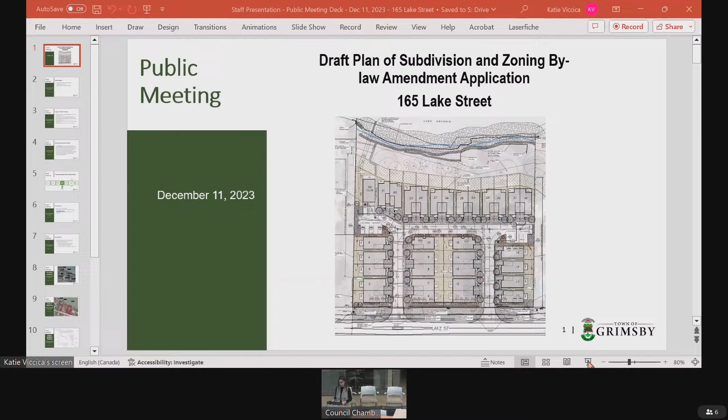Good evening, everyone. My name is Kayla Horton, and I am a planner with the town. I want to thank you all for taking the time out of your schedules to join us for this public meeting. The project to be discussed this evening is the proposed zoning bylaw amendment and draft plan of subdivision applications for the properties at 165 Lake Street.

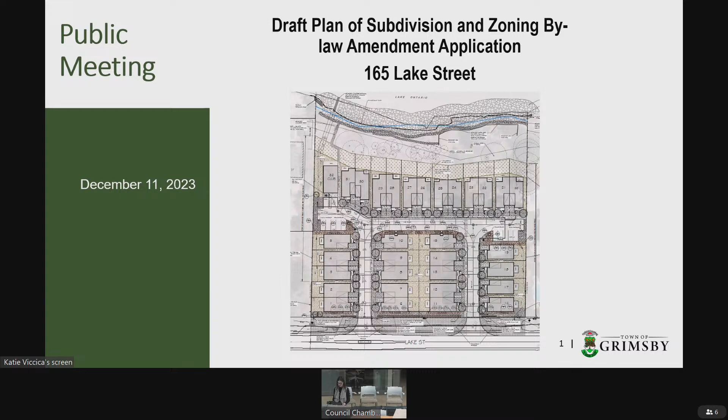Next slide, please. To begin this public meeting, I will be going through a short presentation, providing you all with some insight into the planning process of this application and briefly introduce what is proposed for the site. Next slide, please. Just to go over the purpose of the meeting tonight, we would like to provide you all with an overview of the planning process for these types of applications.

This includes the process from start to finish and where exactly the town is in this process. An overview of the policy and regulatory framework will also be provided, including the relevant official plan policies and zoning provisions in place. Agency feedback that has been provided will be touched upon. Mr. Ferrari will provide additional details about the proposal, and finally, we are here to answer any questions you may have and gather feedback, which will be taken into consideration to identify any potential revisions that may be needed.

So why can plans or bylaws change? Under the Planning Act, authority is provided to submit applications for development plans that may not meet the current official plan or zoning bylaw. The town's role is to process these applications. These applications are only able to amend the official plan or zoning bylaw if it is determined that the proposed changes comply with the overall intent of the official plan, and the result is a development that is compatible with the surrounding area.

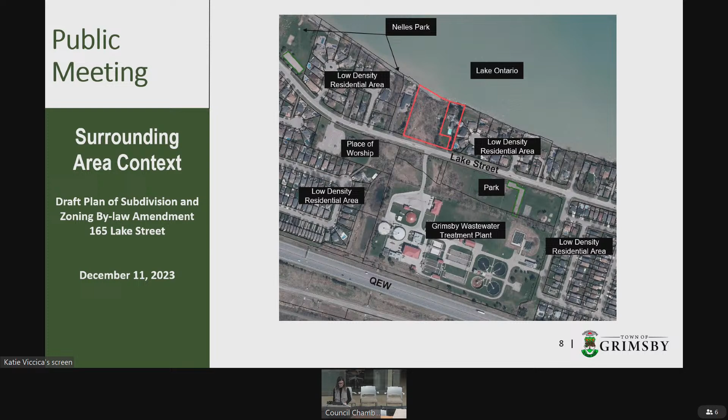The subject lands are a rectangular-shaped parcel located on the north side of Lake Street along the shore of Lake Ontario, comprised of the lands municipally known as 165 Lake Street and the adjacent vacant parcel to the west. The subject lands are comprised of two separate lands as shown on the screen. The site is currently occupied by a single detached dwelling with associated accessory structures, an in-ground swimming pool, and multiple existing trees. West of the subject property along the shoreline of Lake Ontario is public access to the waterfront as shown on the slide.

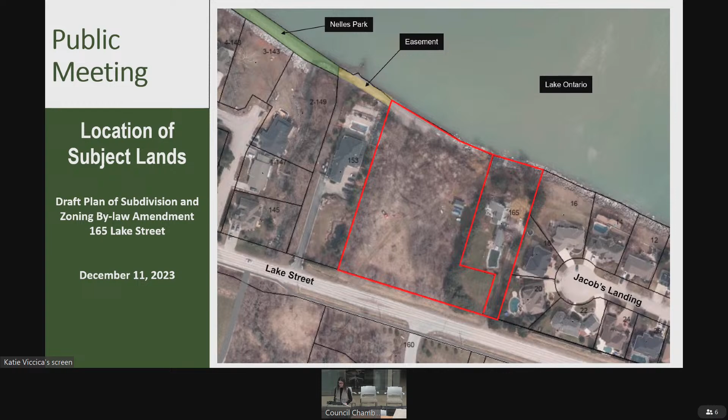Moving on to the proposal, this slide shows the preliminary draft plan of subdivision. The applicant is proposing a zoning bylaw amendment and a one-block draft plan of subdivision to facilitate the proposed development, which I will show on the next slide.

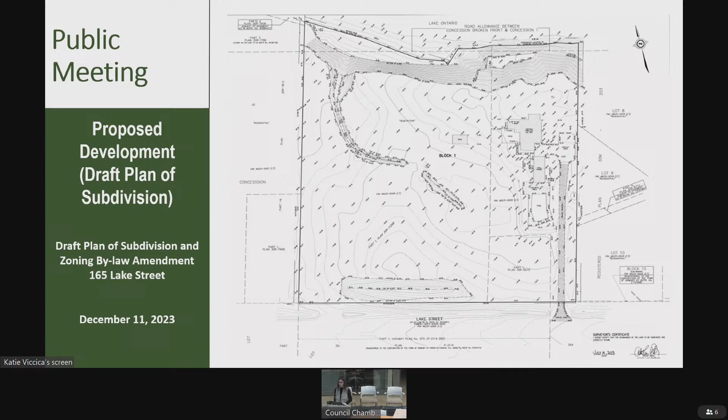The proposed development is to create 31 new residential dwellings, which include 24 semi-detached dwellings and 7 single-detached dwellings. The proposed zoning would be amended from the residential detached 2, RD 2.35, and neighborhood development ND to multiple residential, otherwise known as RM1 zone.

A future condominium application will be related to these applications in which a common element condominium road would loop through the site. The applicant's presentation will provide more detail on the proposed development concept.

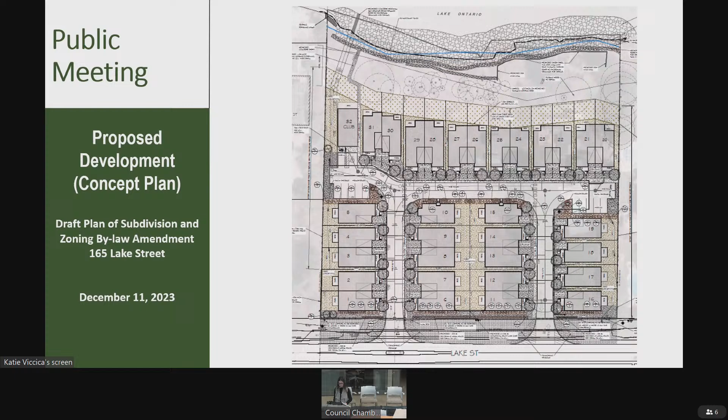The policies for the low-density residential area designation is located in section 3.42 of the official plan. This designation permits a mixture of residential uses, including single detached and semi-detached dwellings. It is considered a stable residential neighborhood, but does allow for limited development, evolution, and rejuvenation.

The policies for the environmental conservation area designation is located within section 3.12 of the official plan. Lands designated as environmental conservation area form part of the natural heritage system and represent significant natural features and core natural areas within the town, including key natural heritage features and key hydrologic features within the Greenbelt Plan. Development and site alteration must demonstrate through an environmental impact study, otherwise known as an EIS, that over the long term, there will be no significant negative impact on natural features or ecological functions on adjacent lands.

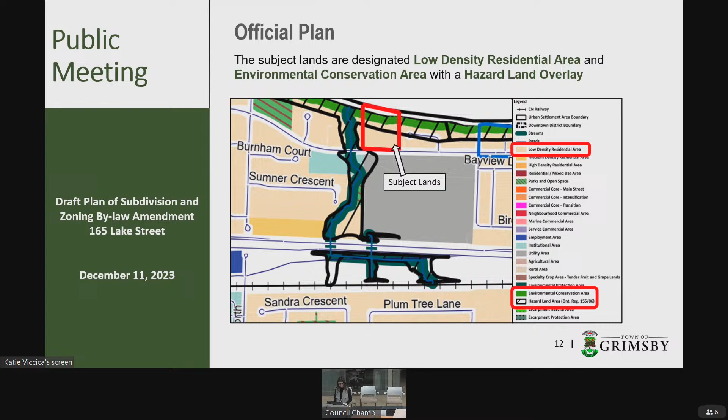The policies for the hazard land overlay are found in section 3.2 of the official plan. The hazard land overlay represents areas that have inherent physical hazards, such as flood susceptibility, steep slopes, erosion susceptibility, or other physical conditions which is severe enough to cause property damage and/or potential loss of life if the lands were to be developed with habitable buildings or structures. As such, flood and erosion-prone lands along the shore of Lake Ontario is included in this overlay.

As stated earlier, the subject lands are currently zoned neighborhood development ND and residential detached 2 RD2.35 with a hazard land overlay zone HA. The hazard land overlay zone is shown in light gray in the image on the screen. The neighborhood development zone permits existing uses and existing zone regulations. The residential detached 2 RD2 zone permits a range of residential uses with a 35% lot coverage. The hazard overlay zone restricts development, and the provisions of the overlay zone supersede the provisions of the underlying zone. Permitted uses, among others, include flood and erosion protection work, parks, and conservation use.

The application for a zoning bylaw amendment proposes to change the zoning to multiple residential 1, RM1, with site-specific modifications in place to facilitate the development of 31 new residential units. Proposed modified performance standards include additional permitted uses for single detached dwellings and an accessory amenity building, maximum building height, minimum lot area, minimum lot frontage, maximum lot coverage, minimum front yard, minimum exterior yard, and minimum rear yard. Please note that the application for a zoning bylaw amendment does not remove the hazard land overlay zone.

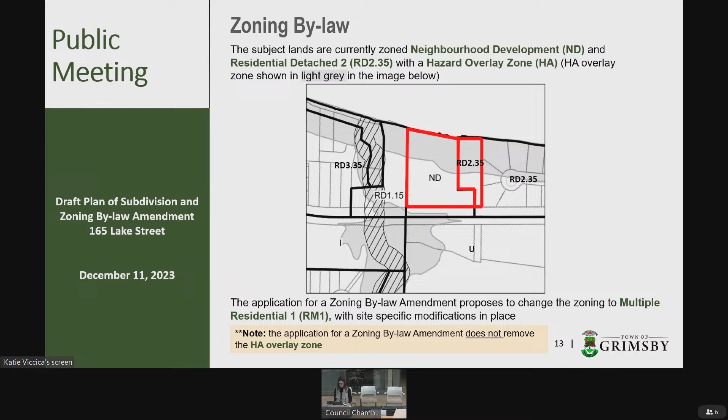The applications were circulated to external agencies and internal departments for review and comment. A full comments matrix of all agency comments is provided in Appendix F of Staff Report PA 2341. Comments include conditions of draft plan approval of subdivision, technical comments related to grading, servicing, drainage, and other impacts were also provided to the applicant, among others.

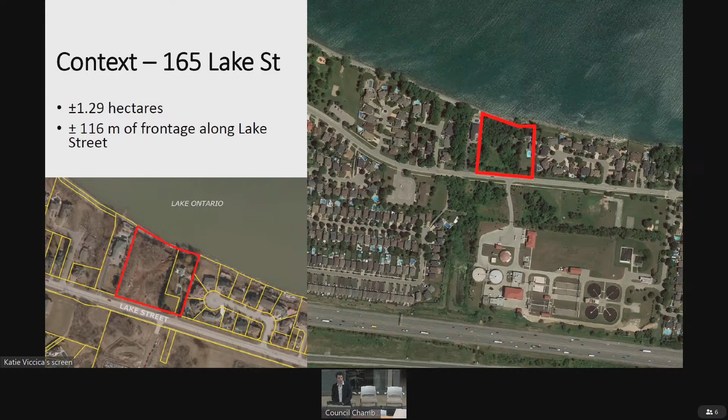I'll go over a little more detail about what exactly we're proposing here. Kayla provided a good overview of the site. I think everyone knows where we are, 165 Lake Street. It's actually technically 2 parcels of land. It abuts Lake Ontario currently, and is primarily surrounded by low-density residential uses. If you go to the next slide.

I want to spend a little more time on exactly what's proposed. We're proposing a draft plan of subdivision with 1 block. The reason why it's 1 block is because this block will be further subdivided at a future time to delineate individual elements of the future condominium. So I'll go through that in a second, but I just want everyone to understand this is 2 applications, not just 1. It's a subdivision, technically, and a zoning bylaw amendment. So we can go to the next slide.

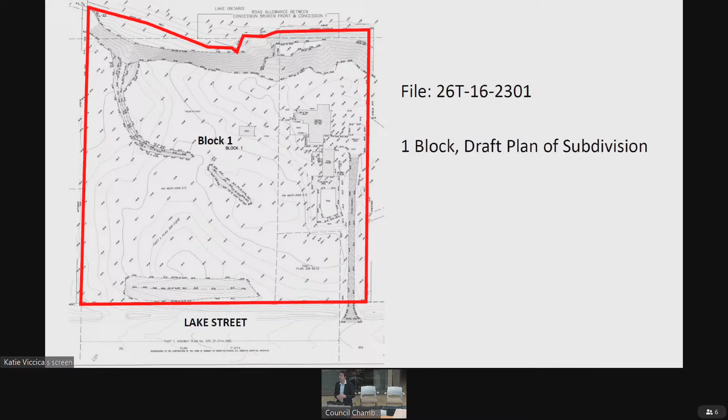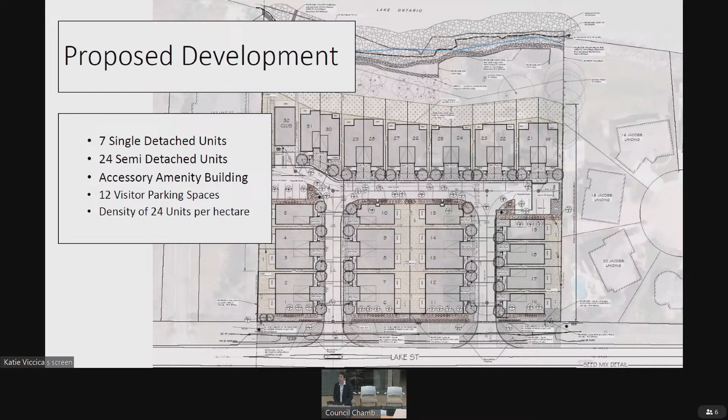I have a better view of our site plan, but I just want to give everyone a high-level overview of what we're proposing. The idea is that what will be subdivided are each of the individual lots of the future units here. There will be a common element proposed, which will comprise of that private road, with 2 entrances onto Lake Street. In the top left corner, I have a better picture in the next slide. There's going to be an amenity clubhouse. Yeah, and the next slide shows that as well.

So what's being proposed here are not townhomes. What is being proposed are single detached dwellings and semi-detached dwellings on these lots. The amenity clubhouse is on the top left corner there, delineated by number 32. What's going to be there is a fitness area and a rec room area, which is the exclusive amenity intended for the residents there.

I also want to point out on this site plan, at the top is Lake Ontario. That blue line approximately represents where the shore is today. So what I just want to impress upon everyone is the setback between that blue line and the back of the dwellings proposed on this site. There will also be shoring protection works, which I'll get into in a second.

Primarily, these dwellings are going to be 2 stories. There will be an amenity deck on most of them, and we have a slide later on to show you where these amenity spaces are going to go, because one of the things that's important to us is mitigating any overlook conditions. I'll show you that slide in just a moment. Next slide, please.

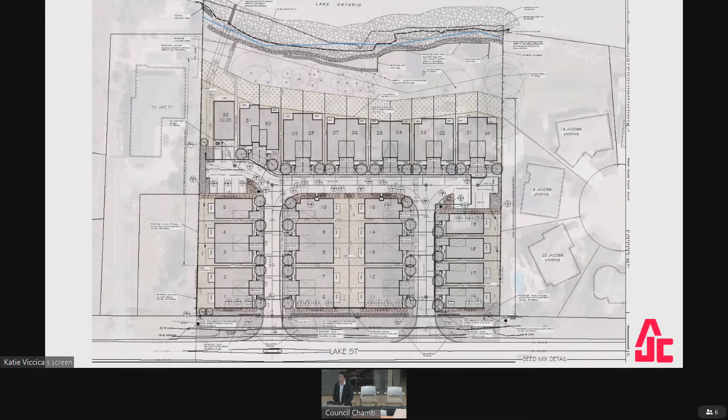Just high level, I think it's important to highlight the process we've been through so far. As Kayla noted before, this application originally came into the town of Grimsby back in 2023. Since that time, staff gave us a whole list of studies to prepare. I won't go through them exhaustively, but I have the list here. They included things like an environmental study, an odor study, a shoreline protection plan, a tree protection plan, a site plan, renderings, things of that nature.

Engineering plans, grading, servicing — those questions might come up today. So all these plans have been submitted to staff as of November of this year, and they have been reviewed. But I also want to impress upon those here in the committee today that Sam and Stephanie have tried their best to reach out to neighbors, especially the immediate neighbors to the east and west of the property, to let everyone know that this development is coming through.

And I know this is probably the first time everyone's seeing a lot of details, which I'll provide later on in the presentation, but it's something that I wanted to impress upon Sam and Stephanie at the beginning: get out, talk to the neighbors, show you what we're doing. Certainly we're open to keeping a dialogue with the neighbors because my understanding is it's been open so far and we want to continue that.

So discussions with neighbors happened June, July of this year. We made a submission in September. We did do a site visit with NPCA staff, who are the local conservation authority, with local staff as well. Park staff were there. So we've done a whole review of the subject site. We visited it, staff visited it. We know what the on-site conditions are. And then we just received staff comments a couple of weeks ago. So the goal of this meeting is to go through those staff comments from a technical perspective and receive any feedback from you folks here today. And we're going to incorporate all those comments, look at them, and provide feedback to staff after this meeting. So I just want to provide a quick overview.

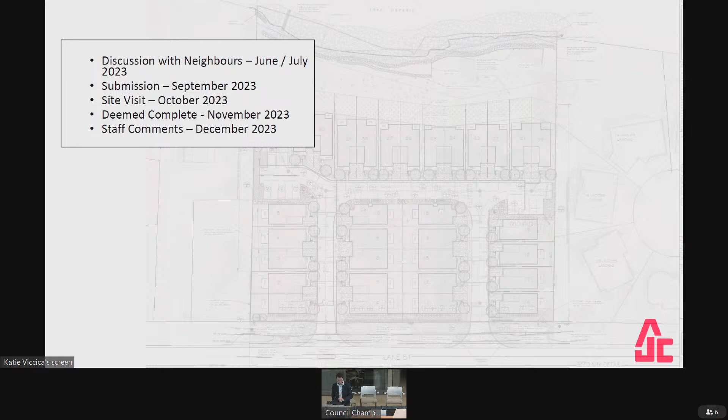So now, rather than getting into too much detail, this is the preliminary shoring wall design. As you can see, it stretches across the site and will join up with an existing shoring wall on the east and west. So the west side has been shored and the east side has been shored. The whole purpose and intent of the shoring wall is to establish a stable top of slope from the lake. And outside of this whole development, regardless of the 31 units, this work needs to be done, okay? To shore up the wall and to provide a solid setback for the dwellings you see facing the lake. So this is a preliminary shoring design.

What will happen at this point, and Milo may be able to speak to this a little bit later on, our shoring consultant - this is a preliminary design. Detailed design is going to take place through the draft plan of subdivision process and included as a condition of that draft plan. So preliminary design shown here. There's still a lot of work to be done on the shoring design. And certainly we'll look forward to working through that with staff.

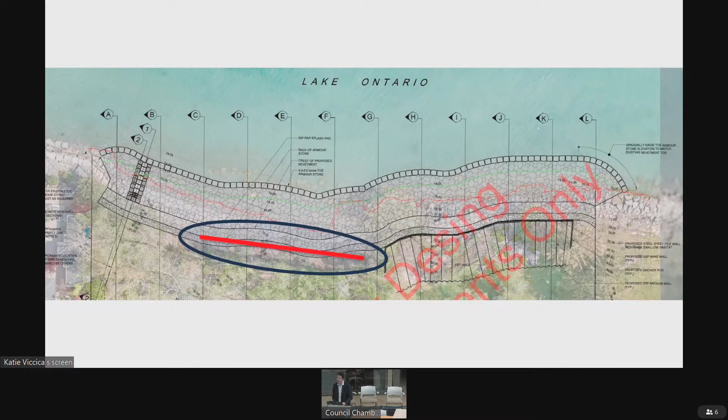One thing I want to point out here, everyone sees a red line and a blue circle surrounding it. What this line represents is an existing habitat for an endangered species. They're a form of nesting birds that like to burrow holes in the side of the hill. So the current condition today, and I have a picture of this on the next slide, is it drops off as a cliff. You can sort of see this here. This is from our site visit. So these birds nest in the side of the cliff here.

They burrow holes, so because these are species at risk, we do have to be mindful of them. So what our plan is, we're going to recreate their habitat, shown on the next slide. So as part of that shoring wall works - and this is just an example, this is actually a stock image I just pulled up from the internet - these birds, we're going to put these hollow areas for these birds to nest in. And basically what that's going to result in is no construction can take place during breeding bird season, right? So construction can only take place between October and March of any given year. And that's how we're mitigating for that.

There is a process that goes along with this with the Ministry of Environment, so it's even above the city and the municipality's purview. But it's something we're working with the ministry on. We're going to submit what's called an overall benefit permit to them to show them how we're mitigating for this habitat. And so that's going to be another feature of the shore wall and something that we're mindful of and considerate of and want to make sure we do right. So I just wanted to note that as well.

So the shore wall is a complicated thing. There's a lot of engineering that goes into it, but also we have to deal with species at risk that are on site as well. So that's a little bit about the shore wall. Next slide.

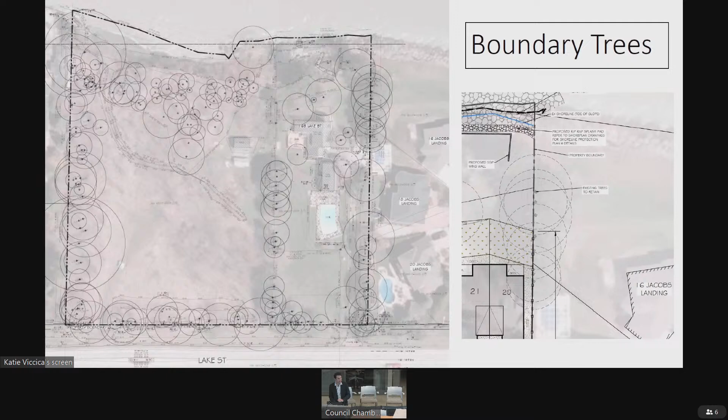The goal is to maintain them whenever possible. There are techniques like air spading we can use to help keep the trees alive. If this application is approved, we'd submit a detailed tree protection plan showing how the trees would be retained. Sam and Stephanie have already spoken with the neighbors about compensation if there's injury or damage—whether new trees would be planted or monies owed. That would be between my client and the neighbor owning the property. I mention this because it's an important issue we've tried to get ahead of, and we'll continue speaking with our neighbors about the boundary trees.

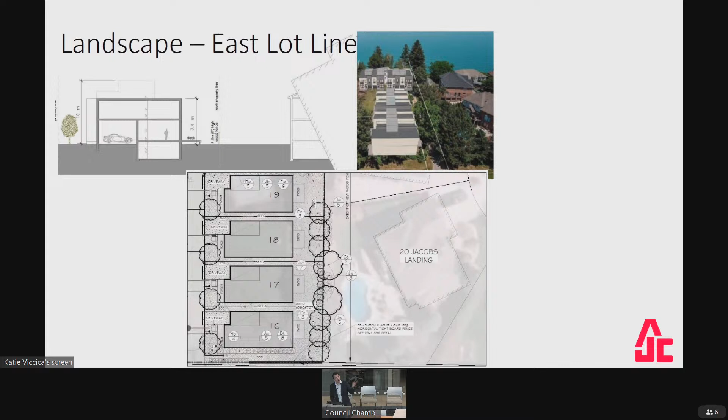I'll go to the next slide, which has better pictures of the sections. I touched on this top floor amenity—we've taken care to mitigate overlook on people's privacy areas. It's a bit tough to see here, but if I could point everyone to the 4 single detached dwellings, generally on the bottom right corner of the picture.

There are amenity spaces on the top floor. They face out into the development, not into neighboring properties. So for those 4 dwellings, no one will be able to access the roof and look into your backyard—they'll be looking out towards the development. The same rule generally applies on the other side.

The section at the top right corner shows the built form. I have renderings in a second, but these are 2-story dwellings with a vestibule to access the rooftop amenity, pushed into the middle of the building so it's as far from the edge as possible—again trying to mitigate overlook concerns. Next slide, please.

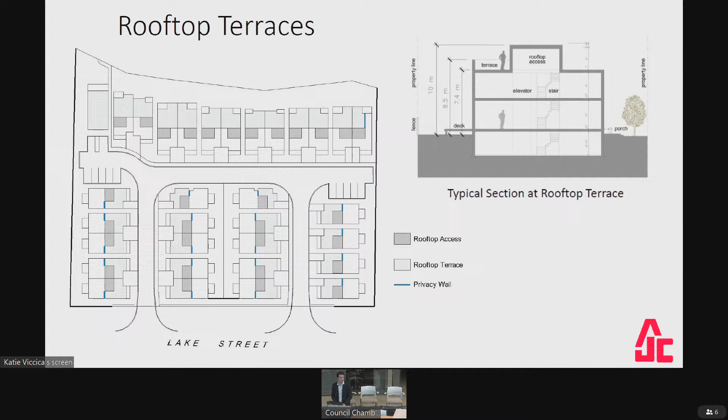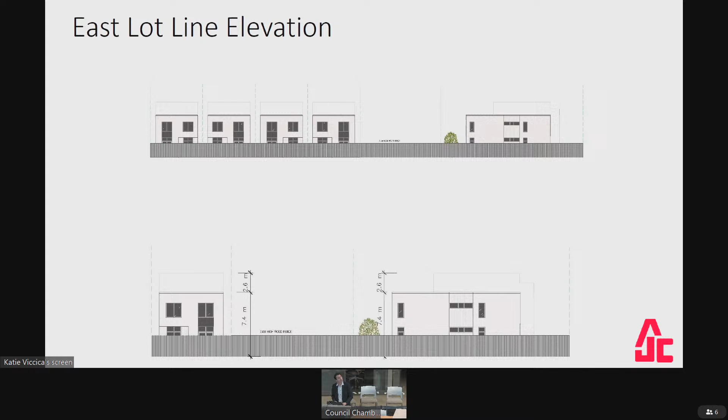So with the next slide here, there are some appendices we can go to. They're just supplemental information, not necessarily part of my presentation, but if we need to refer to them, we certainly can. At this point, I'm happy to stop, open to any feedback folks want to provide, and answer any questions. If we can't answer them today, we'll go back to our consultant team and answer them as soon as possible. So that concludes my presentation, I'm happy to answer any questions.

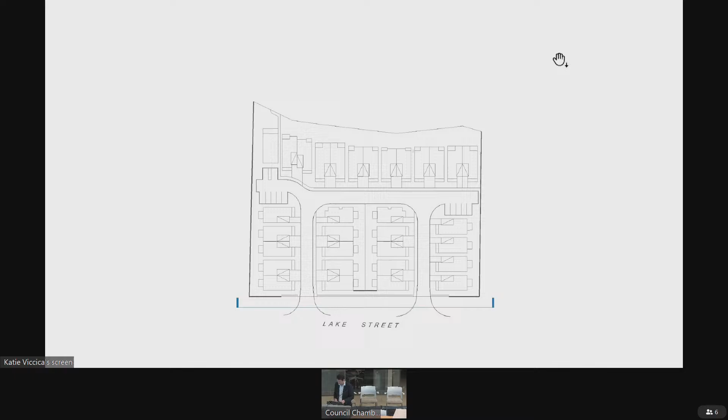Thank you for your presentation, Ryan. Now we will open up to members of the public. First up, we have Richard and Linda Dunda.

Just a couple of questions. Yeah, you go up to the podium. One was the exterior—yeah, you need to go up to the podium.

Hi, we just had a couple of questions about the exterior—stucco, brick, whatever—because there were no renderings online. And the second one is, if I read correctly, it's 3 meters, or 1 meter, 0.9 meter between dwellings. Does that include the semi-detached as well as the detached? And then I also didn't notice any extra visitor parking, unless I missed it.

That's it, thanks Richard. Up next, we have Dennis and Debbie White.

Hi, we live on Jacobs Landing. We'd like to know when the neighbor consulting was done, because we were not asked about this.

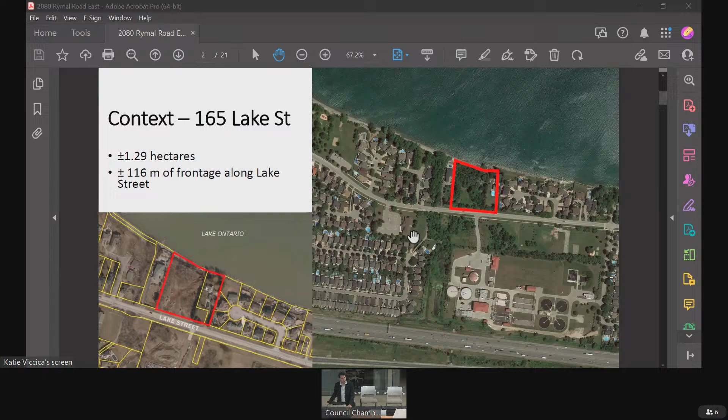It's all right. Yeah, if you can just pull up the site plan when you get a chance. And if possible, zoom in to the right side where it says 18 Jacobs Landing, best you can.

I'll go through the questions one by one and do my best to answer them. I think one of the gentlemen mentioned a 0.9 meter setback. I believe this refers to the closest point of the curb to the property line. In our bylaw, we recognize the location of the driveway adjacent to the property line, but there's a pinch point at 0.9.

The reason for that is to provide car turning movement coming in and out of the visitor spaces and the driveway there. If that doesn't answer your question, I'm happy to stay and discuss it further.

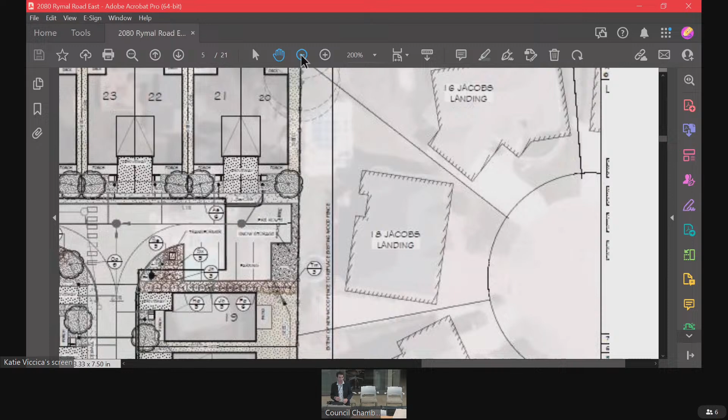Regarding visitor parking, there's two banks, and I'll wrap these together. There was some discussion about the clubhouse and how it interacts with visitor parking. The clubhouse is an exclusive use amenity for residents of this development. The intent is there may be a fitness room, and a room that owners within the condominium can use for gatherings, barbecues, things like that. It's not intended to be a public clubhouse that anyone can go to. It's strictly an amenity for the residents there.

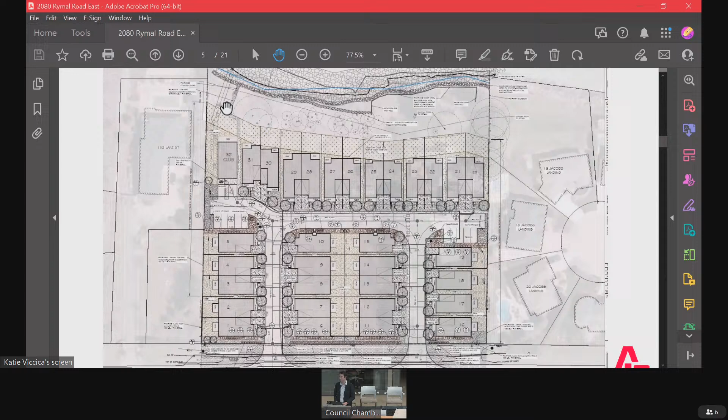There will be some visitor parking, but there's cars on the driveway and there's also visitor parking as well. Staff didn't ask us for a parking study when we submitted, and we felt the number of visitor parking spaces is appropriate for how many units we have. So I hope I answered that question.

There's some question about materials, and I think Craig is here. I don't know if he wants to just mouth me what we're looking at with materials. I think we want to avoid EIFS - that's what we want to avoid, right Craig? Materials are stucco, stone casing, and concrete and metal siding with wood.

There was someone online that mentioned consulting. Just to be very specific, we consulted the immediate neighbors to the east and west. The gentleman online didn't tell me where he lived, so I assume he wasn't one of the 3 houses on the east side or the neighbor on the west side. So that answers the question about neighbor consulting.

There was a question about energy efficiency, which is a great question. We're getting that question time and time again. It's something we're going to take back and look into now that you've mentioned it. At this stage, the zoning stage, we don't typically go in and fully design the buildings, as that happens at building permit stage. But now that it's been mentioned again and again, we can certainly look at that through site plan and make it a priority.

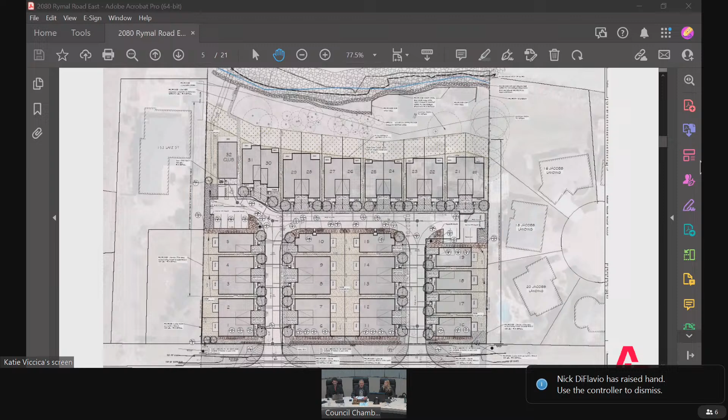All right, thank you, Ryan. Any further questions from the public? Walter? All right, okay, go ahead.

Just to answer, through the chair, Councillor DiFlavio's question regarding waterfront access—the town has requested a public access easement to the northwest corner of the site, and we'll be requesting cash in lieu for the remaining amount. Details of the layout of that easement and the routing will be dealt with at a future site plan stage. Thank you. Great, thank you, Kayla.

All right, seeing no further questions, thank you everyone for participating in the public meeting. The consultants and staff will take back your feedback, and please contact staff at planning@grimsby.ca if you have any additional comments or questions about the proposal after this evening. The public meeting is now closed. Thank you.

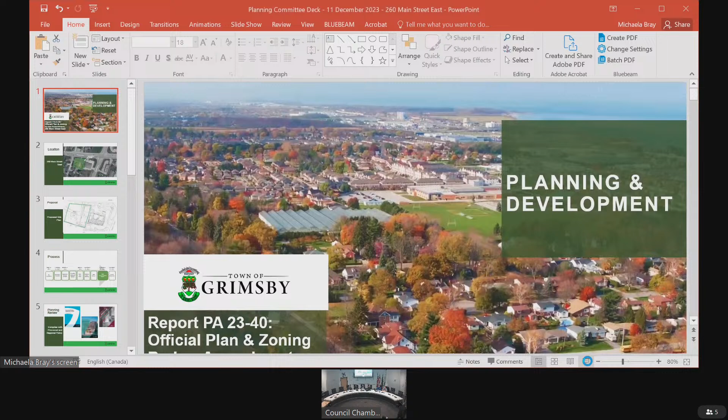Good evening, everyone, Mayor Jordan, councilors, members of Planning Committee. My name's Michaela Bray, planner with the town of Grimsby, and I'm here to present report PA 23-40. This is the recommendation report for 260 Main Street East for their application for an official plan amendment and a zoning bylaw amendment on the site.

The location of the site, the subject lands of these applications, is 260 Main Street East, right at the intersection with Park Road South. This slide shows both the site that is the subject of these applications, as well as the adjacent site directly to the east, 264 Main Street East, which these applications kind of facilitate development that's actually going to be happening on the site next door. But I'll get a bit into that further.

I just want to note that last month, I believe it was November 21st, a consent application went to the Committee of Adjustment, and that was to sever the easternmost part of land on the subject lands. The intent of that is to merge that severed land with the adjacent lands at 264 Main Street East to increase the available parking there. This increase in parking on the adjacent lands is mostly going to be on that severed parcel that will be merged with it. So all the development is kind of happening right in that center part between the dwelling on the subject lands and the existing commercial building on the adjacent lands to the east.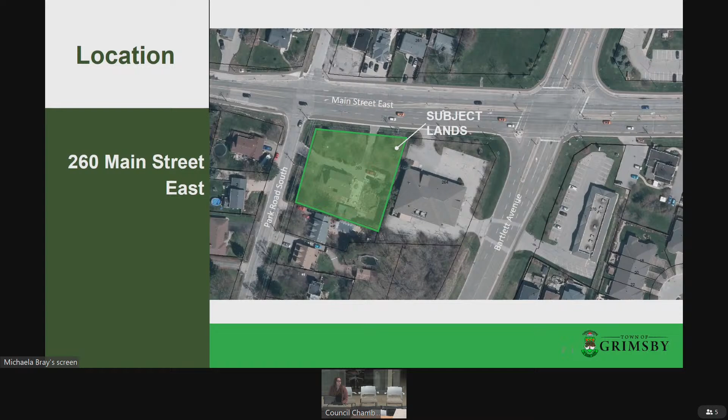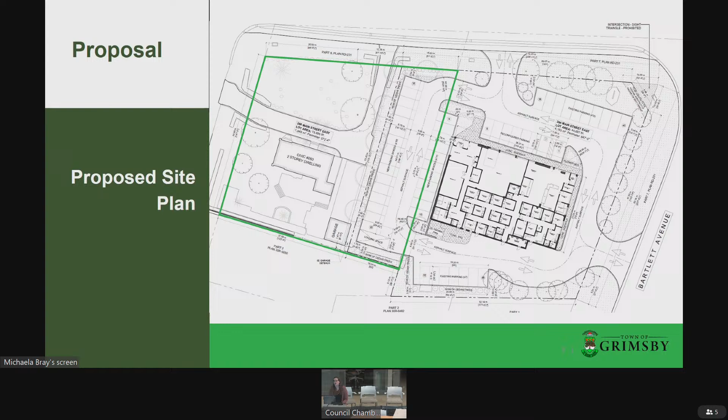For the proposal, as I mentioned, the applications are for the lands at 260 Main Street East, and it's an OPA and ZBA. I'll get into details on that. The zoning bylaw amendment really applies to the full extent of the subject lands at 260. The official plan amendment and zoning only apply to that part which was severed by the Committee of Adjustment last month, pending being merged onto the adjacent lands. But I have slides with more detail on that coming up.

I'm just going to go over some of the process for this application, relating to the official plan amendment and zoning bylaw amendment only. As some of you are aware, there have been other applications on these lands and the adjacent lands, such as the consent I was mentioning, and a previous minor variance from about two years ago. That variance was just to allow some reduced parking with the condition that part of that commercial building on the adjacent lands wasn't being used.

For the OPA and ZBA, the initial pre-consultation was in May of last year. We received the application submission in February of this year, got all the materials, and deemed it complete by the end of March. Since then, we've been doing review both from the town and external agencies. We did the public open house back in April, and the public meeting in September. We've been doing analysis ever since, and we've gotten to the point in the application that we're comfortable giving a staff recommendation to the planning committee right now. Depending on the committee's decision today, the recommendation will go to council on December 18th to be ratified.

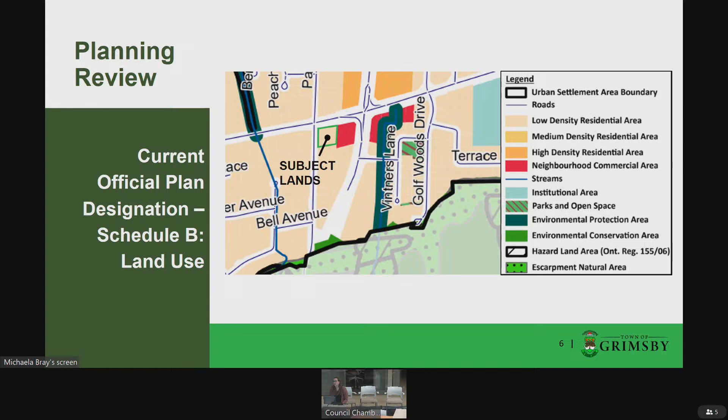The proposed official plan amendment applies to Area A, which would be redesignating from low-density residential to the neighborhood commercial area designation. That designation would match what is on the adjacent lands at 264 Main Street East, so that sliver rectangle of land that's going to be merged would all end up being neighborhood commercial.

Area B is going to maintain its low-density residential area designation. It's also going to maintain the heritage dwelling and its residential use on it, so there's no change to that area for the official plan amendment.

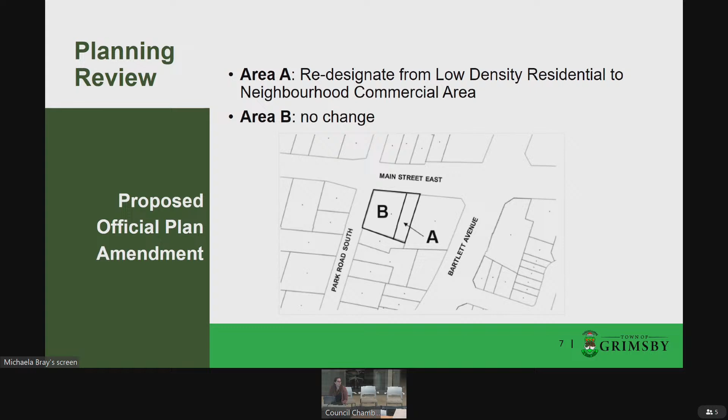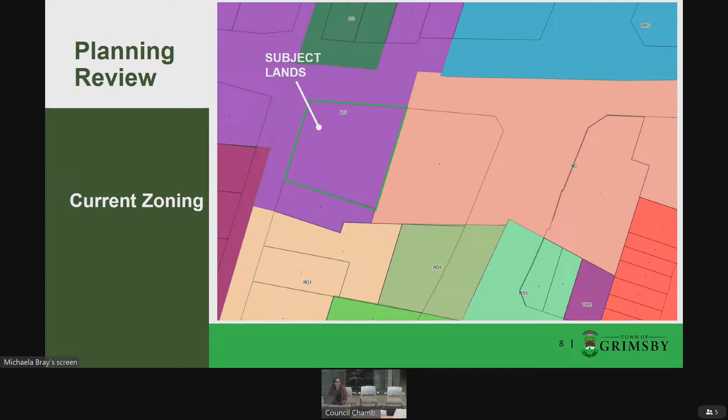Going over the zoning, the current zoning for the subject lands is a Main Street zone with no site specifics. The zoning amendment does apply to the entire site, so both parts A and B.

Part A, the land that's going to be merged with the adjacent lands, is currently that Main Street zone, and it's going to be rezoned to neighborhood commercial, matching the adjacent lands at 264, except this small strip area A is going to have its own site-specific zoning, related to a reduced landscaping strip, a reduced parking lot setback, and a reduced parking space setback from the road.

Area B is being rezoned from a Main Street zone with no site specifics to a Main Street zone with site specifics, so we're really just adding a couple site specifics to legalize some of the existing conditions. When part A is merged with the adjacent lands, it's going to reduce that interior side yard setback, just to legalize a reduced setback from the existing accessory building, which is a garage, to what would be their side or rear lot line.

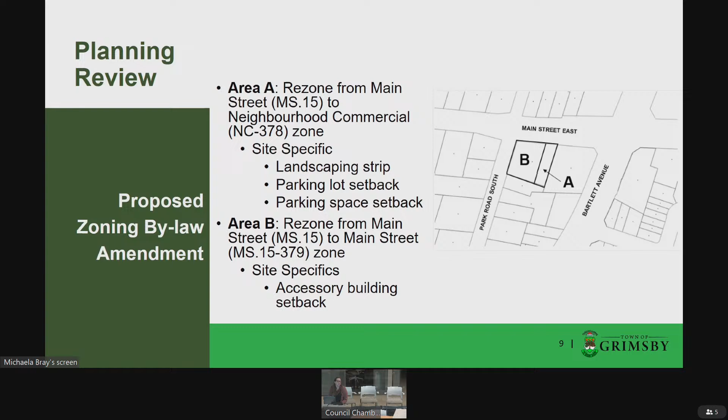Now I'll get into the planning review. As I mentioned, the subject lands are currently designated low-density residential area, and the intent of that is to protect and enhance the existing character while also permitting new development that is compatible with what's existing. A majority of the subject lands, Part B, is going to maintain this low-density residential intent. The entirety of the frontage on Park Road South is going to keep this low-density residential area designation, and a majority of the land facing Main Street East is also going to be keeping this low-density residential designation as well.

As I mentioned, Part A is going to be neighborhood commercial, and the intent of that is to meet daily and weekly shopping needs of the surrounding residents. I also wanted to touch on municipal principle number 10 in the official plan, which promotes using existing infrastructure and not sprawling.

Site layout and design compatibility: there's not a lot of changes to this one. All the buildings that exist on the subject lands as well as the adjacent lands are going to remain as is. The heritage building will be maintained and used continued for residential use, as well as their accessory building. The existing commercial building is going to continue to be used, and that won't be changing.

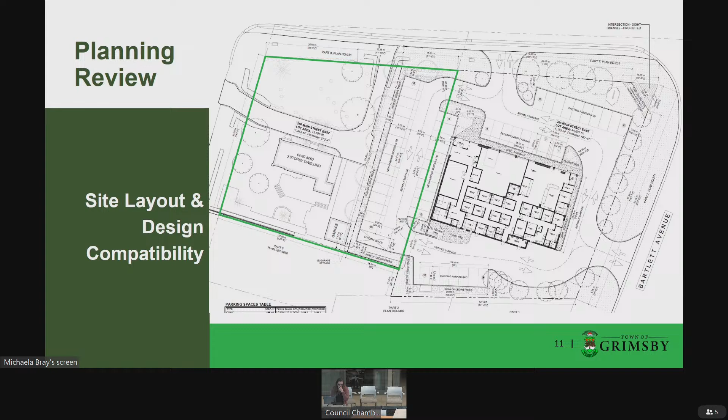I also wanted to note that this commercial building on the adjacent lands is highly visible from Main Street East. By expanding that parking lot and allowing for more uses to go in, since they'll have sufficient parking, it just affords additional businesses and commercial uses the ability to take advantage of this highly visible site on a fairly busy thoroughfare in the east end of town.

So I'm going to go over the parking. That really is the main part of this application.

Starting with the subject lands, that residential dwelling, they're going to be keeping that minimum 2 parking spaces. That's required by Section 5 of the zoning bylaw. They likely have multiple times over that, but that's going to be maintained.

And then on the adjacent lands, they currently have 29 parking spaces, and they've been able to prove that there can be around 47 parking spaces in result.

And where that comes from is that the medical clinic portion of the building is proposed to be about 500 square meters, and using the parking rate of 1 space for 15 square meters, that requires 33 parking spaces for that use. And then the remaining 342 square meters of the building that's not being used for the most part right now, that's kind of necessitating this application.

For a general commercial use, it would be 1 parking space for every 30 square meters, and that therefore requires an additional 12 spaces. So if we were going to base the parking off of medical clinic use and general commercial use, the total number needed would be 45. They have shown that they can go over that by a few spaces.

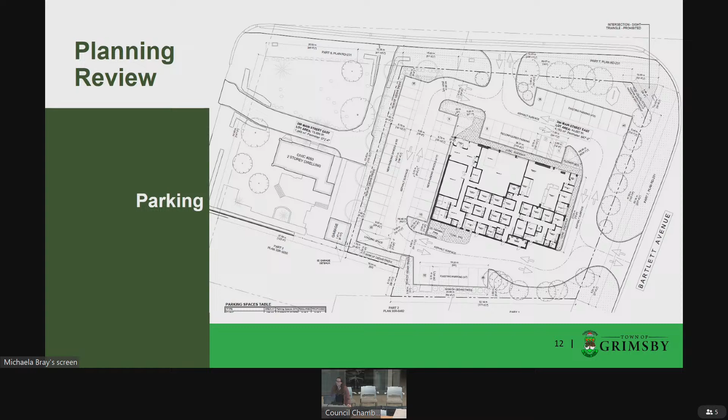So this site, the adjacent site, 264, is subject to site plan approval through bylaw 2251, and that'll address the goals outlined in the official plan section 9.7.6. It includes a review of lighting, grading, drainage, servicing, layout, and that'll come soon, likely in the new year.

I'm just going to go over some of the strategic priorities from council. The priority here is responsible and progressive growth through developing a strong plan for how the community grows and implementing policy through regulations such as the zoning bylaw and official plan.

So the staff recommendation for this is that planning staff are supportive of the official plan amendment and the zoning bylaw amendment, and are supportive of the draft bylaws included in the appendices to be recommended for approval by council at the next meeting.